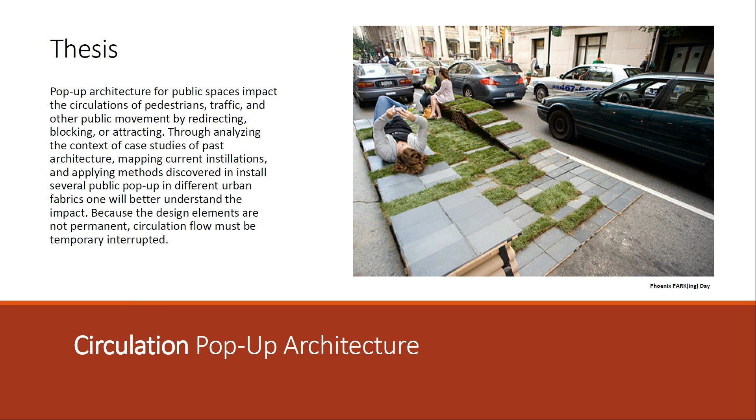A discourse that affects public spaces is economics. Public spaces are successful in high-density areas. When the economy is down, vacant lots begin to emerge, reducing the likelihood of people attending public parks and spaces. Transportation also impacts the successfulness of public spaces due to the public traveling to the dense inner city, which also houses the public spaces.

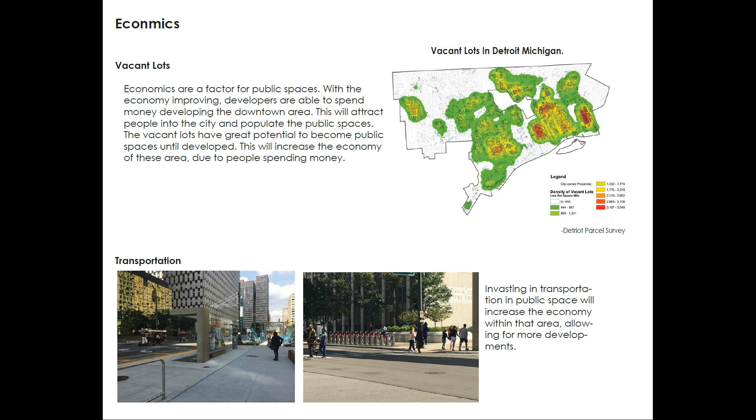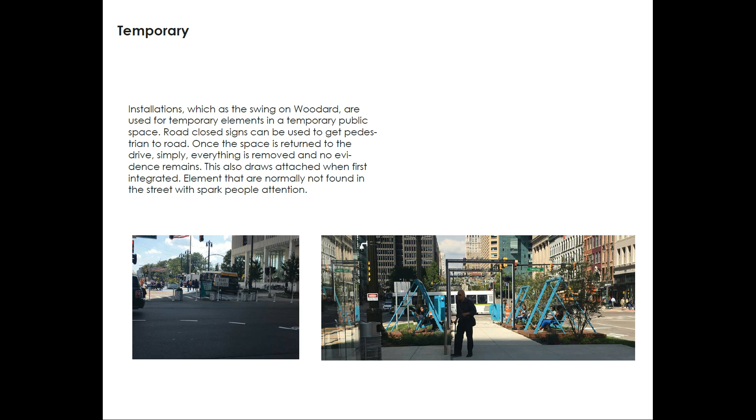In the last several decades, temporary spaces have gained popularity. For example, Detroit has recently closed a part of downtown Woodward to create a public space with swings and food trucks. Also in Detroit, Campus Martius is a public park that is constantly changing. All installations in this park are temporary, allowing an ice rink in the winter and a beach in the summer.

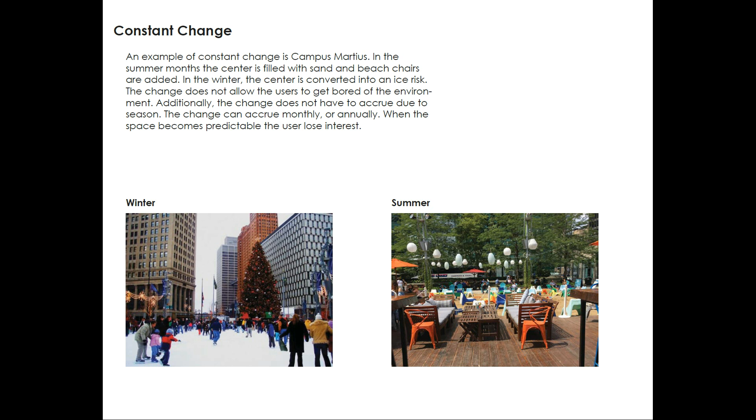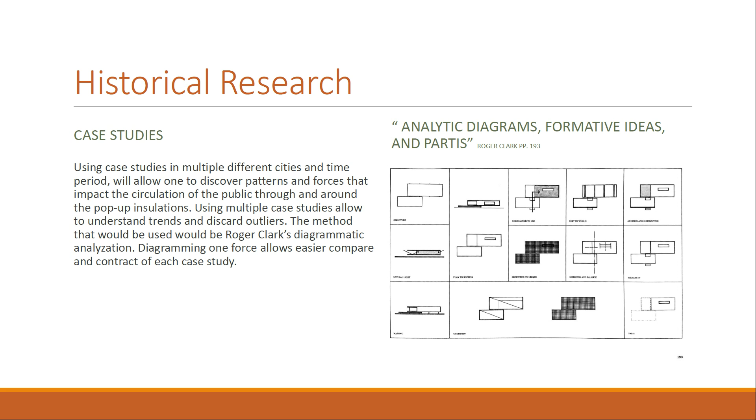The first research method I would use is case studies. One case study in particular I would use is Lent Space by Interboro Partners. Lent Space was a vacant lot located in New York City. The owner allowed Lower Manhattan Cultural Council to temporarily convert the lot into an art exhibit for the public.

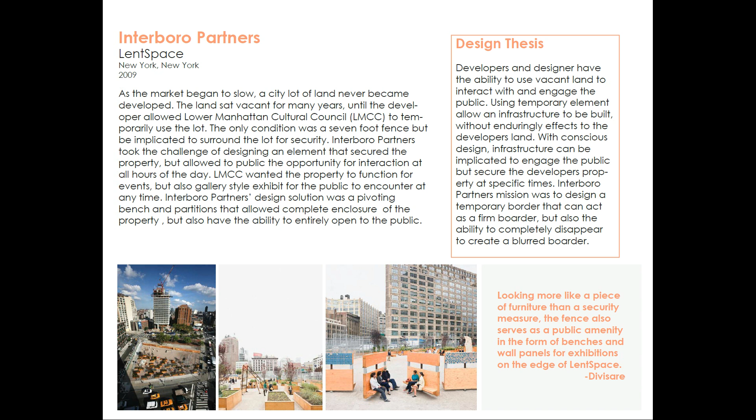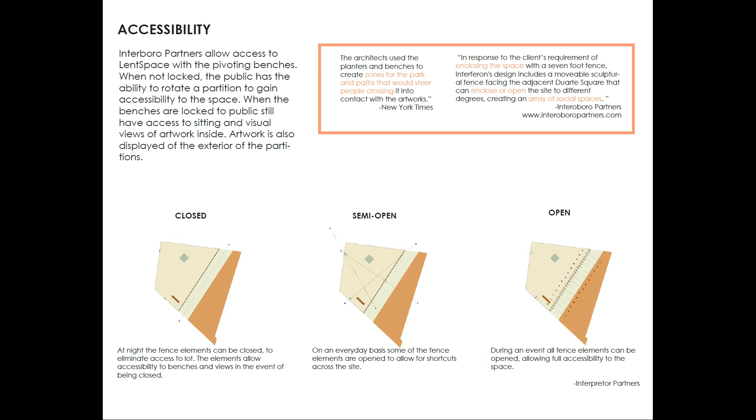What impacted the circulation the most are the pivoting panels on the south edge. This allowed pedestrians to only access the benches when closed, or fully access the event space when open. This also created an in-between state of having semi-opened and closed spaces in between.

The panels allow for physical and visual control. When closed, the pedestrians passing are still allowed to see within the space due to the slits in the panels. When all of the panels are open, the boundary is blurred, inviting the pedestrians at afar to enter the space.

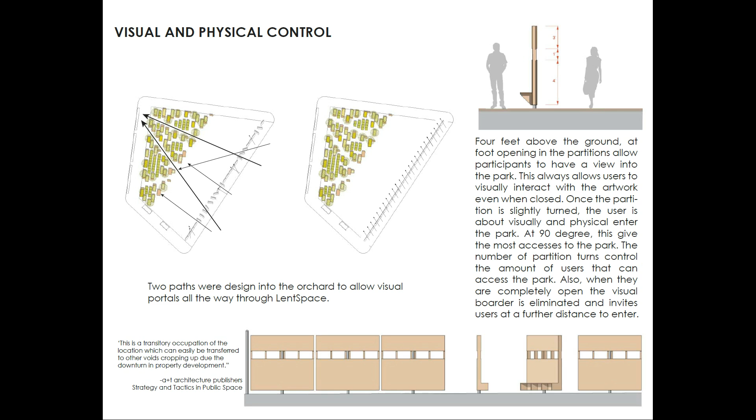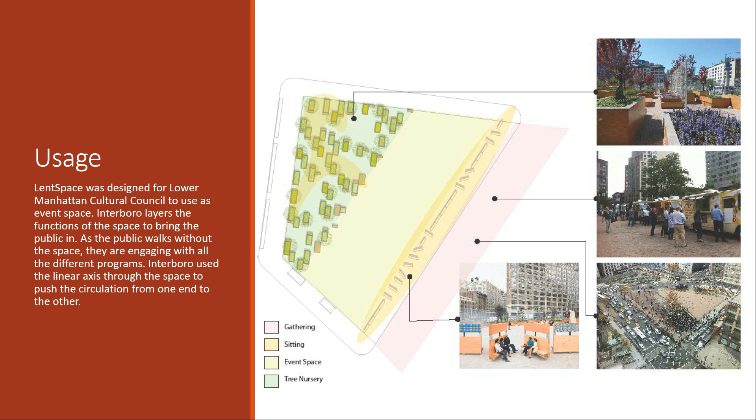Looking at the internal circulation, LentSpace uses zones of interaction. Once entering, there is a large area for the art exhibit. The panels give a specific access point to direct you through the space and around the art exhibit. At the far point, the nursery only allows individuals and small groups to pass.

The bike and vehicle circulation on the outer edge does not change. This gives information that informs that it is difficult to temporarily change circulation patterns due to time and budget.

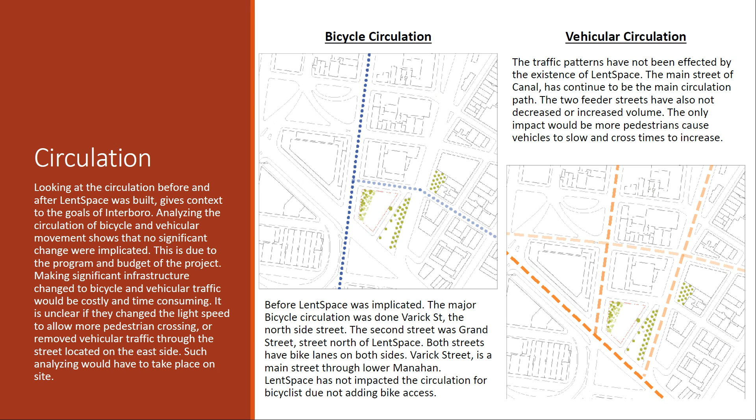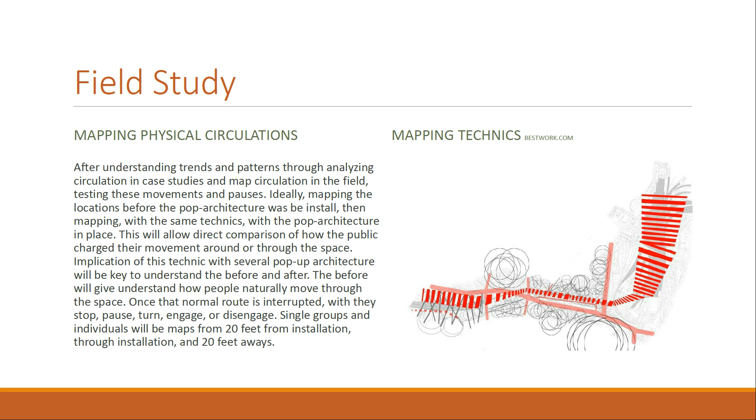To continue with my research methods, I would begin to map circulation before and after physical installations of pop-up architecture. With diagrams of the case study and the mapping of the field studies, patterns and forces will begin to emerge.

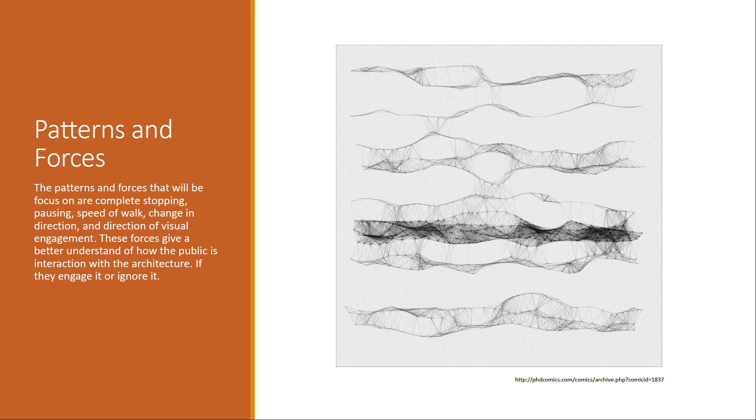Patterns such as why do people stop, pause, speed up, or change directions. Also patterns of where temporary elements are located that most impact the circulation. A pop-up architecture installation would be helpful to prove the patterns and forces I discovered are true.

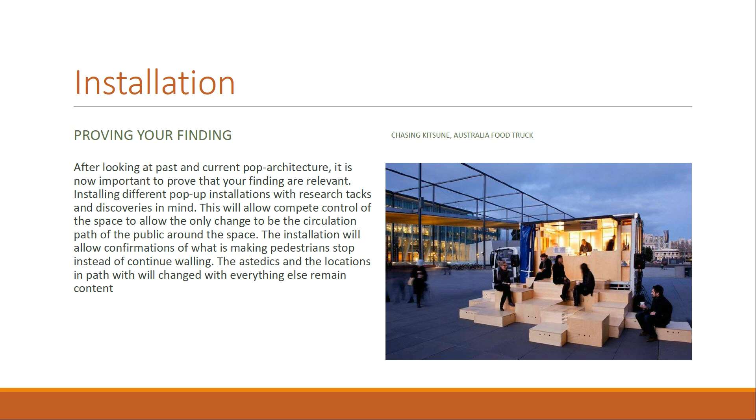The type of spaces I will be looking at are product purchasing, such as food trucks, seated areas, visual attractors, and physical interactions.

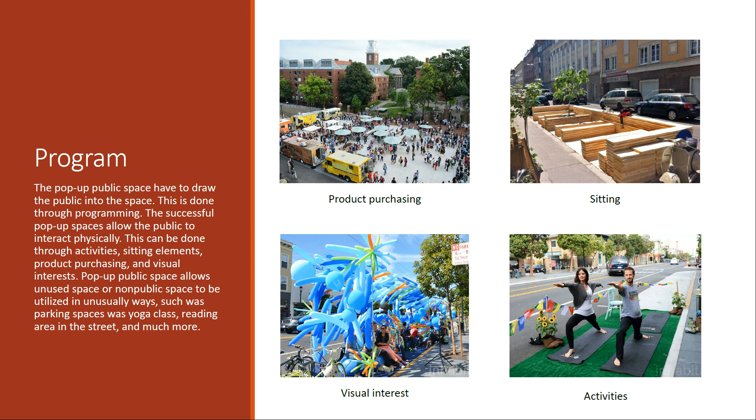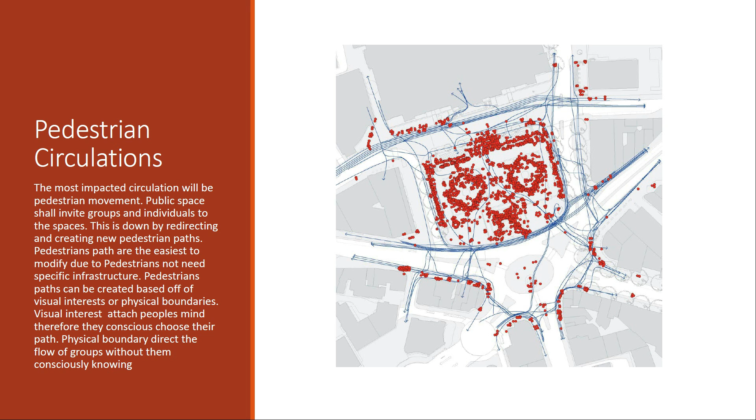The type of pedestrian circulation I will be looking at are group versus individual circulation, physical boundaries and visual interactions directing the flow, and free travel.

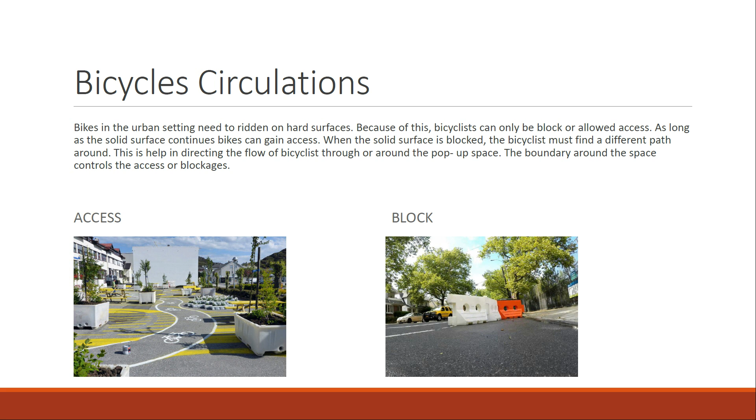The bicyclist circulation will be looking at blocking access or allowing access within the pop-up space. And finally, looking at vehicle circulation, looking at all of the ways to direct, block, and slow the traffic around the space. Pop-up architecture directly impacts the circulation surrounding and within the space.